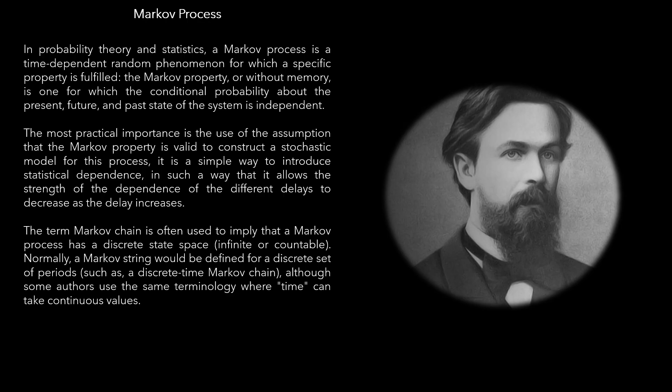We can talk about different definitions regarding first-order Markov processes. States: the conditions in which an entity or possible events are found. Trials: repeated occurrences of an event being studied. Transition probability: the probability of moving from state I to state J in a transition or period.

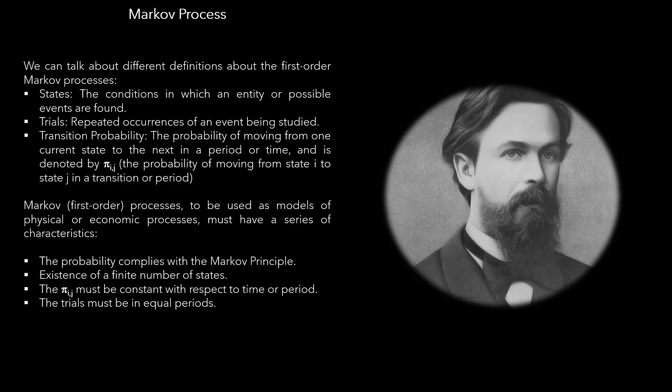First-order Markov processes, to be used as models of physical or economic processes, must have a series of characteristics: the probability complies with the Markov principle, there exists a finite number of states, the probability must be constant with respect to time or period, and the trials must occur in equal periods.

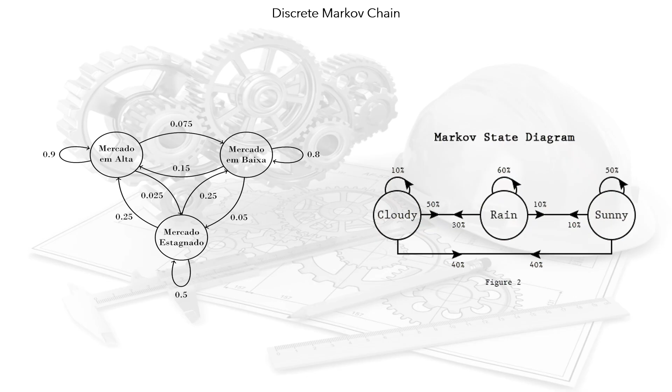The diagram presents two cases of simple Markov chains, one describing customers in a market and one describing the evolution of the climate. Transitions indicate that the probability of migrating from one state to another is independent of previous states and transitions between states. The transition matrix must be estimated from the historical sample, which can be done with a mathematical programming model. The long-term study facilitates the understanding of the behavior of the system.

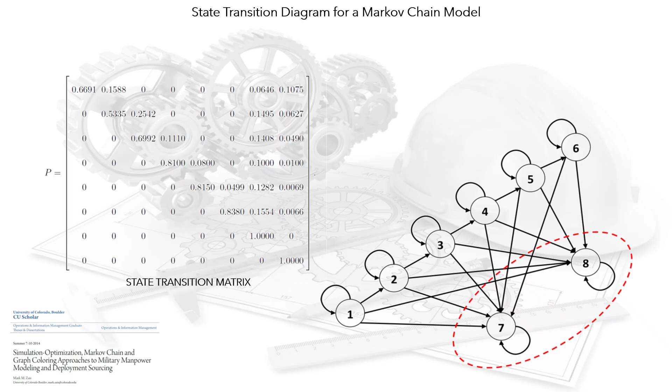The key components of an MDP are: states, the different situations the environment can be in, e.g. a robot's location or a game's board configuration; actions, the choices the agent can make in each state, such as move north, east, south, west; transition probabilities, the probability of moving from one state to another after taking a specific action, incorporating randomness; rewards, the immediate feedback, positive or negative, received after an action, guiding the agent toward its goals; and policy, a strategy or rule that dictates which action to take in each state to achieve the objective.

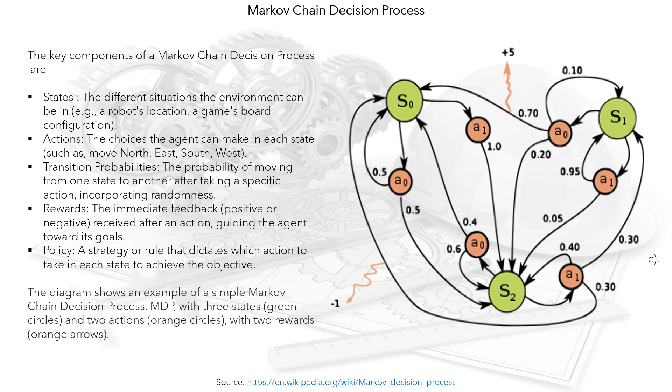The diagram shows an example of a simple Markov decision process, MDP, with three states, shown as green circles, and two actions, shown as orange circles, with two rewards, shown as orange arrows.

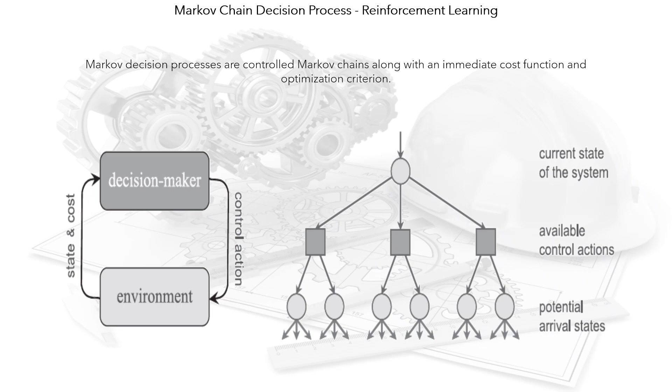Markov decision processes are controlled Markov chains along with an immediate cost function and optimization criterion. The document Linear Programming for Large-Scale Markov Decision Problems proposes to apply mathematical programming to solve the MDP.

The Markov decision process problem is well understood when the state and action spaces are small. Dynamic programming algorithms, such as value iteration (Bellman, 1957) and policy iteration (Howard, 1960), are standard techniques to compute the optimal policy.

In large state space problems, exact dynamic programming is not feasible, as the computational complexity scales quadratically with the number of states. A popular approach for large-scale problems is to restrict the search to a linear space for a small number of features, aiming to compete with the best solution within this comparative class. Two popular methods are approximate dynamic programming (ADP) and approximate linear programming (ALP). This paper focuses on ALP.

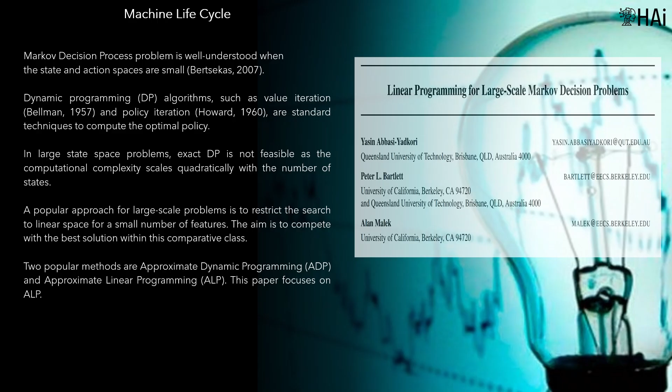The machine life cycle, MLC, aims to establish the characteristics that define productivity in multiple activities such as use, productivity, and wear and tear of the asset because of its use, as well as recovery of productivity thanks to preventive and/or corrective maintenance activities.

The questions to be solved: what are the main features to consider when investing in a machine? For example, do maintenance, turn the machine back on, or replace it? How does the machine's behavior change throughout its useful life?

It is carried out using analytical methodologies to classify the different types of machine behavior patterns according to their technical characteristics and the working environment in which they operate. The objective is the definition and recognition of patterns based on a historical sample of the experiences lived in the organization, or in other similar organizations.

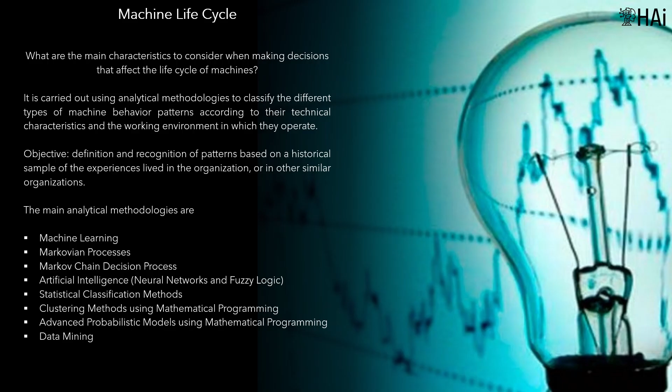The main analytical methodologies are machine learning, Markovian processes, Markov chain decision processes, artificial intelligence, neural networks and fuzzy logic, statistical classification methods, clustering methods using mathematical programming, advanced probabilistic models using mathematical programming, and data mining.

Markov Decision Process optimal maintenance policies are determined by modeling equipment deterioration and maintenance actions as a stochastic process that minimizes costs or maximizes system availability over time. The optimal policy is a set of decision rules dictating when and how maintenance should be performed based on the equipment's current state. In the model, both random failures and failures due to deterioration can occur.

Equipment deterioration is modeled as occurring in k discrete steps. The time spent on each stage of deterioration is distributed exponentially with an identical mean of 1/k·lambda1. The time to failure due to deterioration is represented by an Erlangian distribution. For the application of the stage device, two types of configurations are described, and the parameters of the models are estimated. Maintenance is supposed to improve the condition of the component.

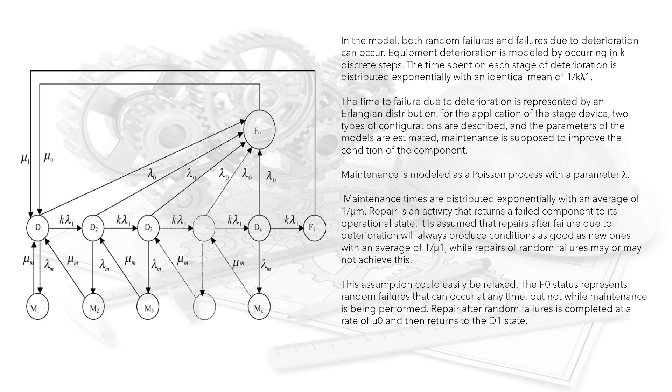Maintenance is modeled as a Poisson process with parameter lambda m. Maintenance times are distributed exponentially with an average of 1/mu m. Repair is an activity that returns a failed component to its operational state. It is assumed that repairs after failure due to deterioration will always produce conditions as good as new, with an average of 1/mu1, while repairs of random failures may or may not achieve this. This assumption could easily be relaxed.

The F0 status represents random failures that can occur at any time, but not while maintenance is being performed. Repair after random failures is completed at a rate of mu0 and then returns to the D1 state. The state space diagram of the maintenance model is shown in the figure.

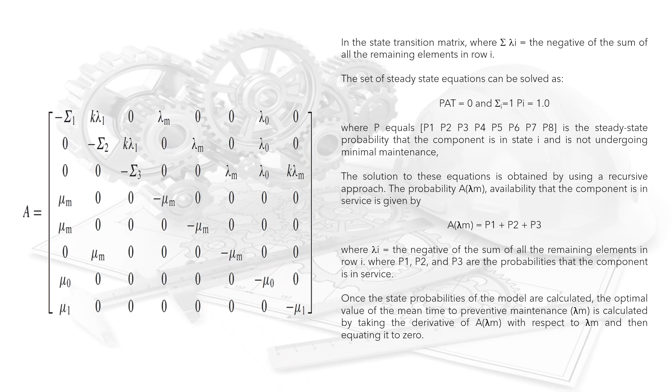In the transition matrix of states, where the sum of lambda I is the negative of the sum of all the remaining elements in row I, the set of steady-state equations can be solved as P·A^T equals 0, and the sum equals 1. Where P equals P1, P2, P3, P4, P5, P6, P7, P8 is the steady-state probability that the component is in state I and is not undergoing minimal maintenance. The solution to these equations is obtained by using a recursive approach.

The probability, A of lambda m, or availability, that the component is in service is given by: availability equals P1 plus P2 plus P3, where lambda I is equal to the negative of the sum of all the remaining elements in row I, and where P1, P2, and P3 are the probabilities that the component is in service.

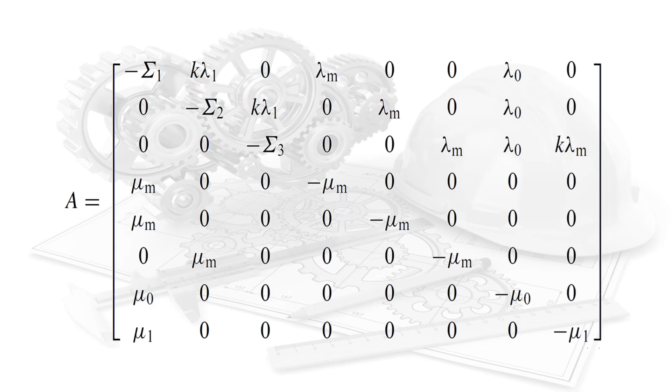Once the state probabilities of the model are calculated, the optimal value of the mean time to preventive maintenance, lambda m, is calculated by taking the derivative of A of lambda m with respect to lambda m and equating it to 0. The solution to these equations is obtained using a recursive approach.

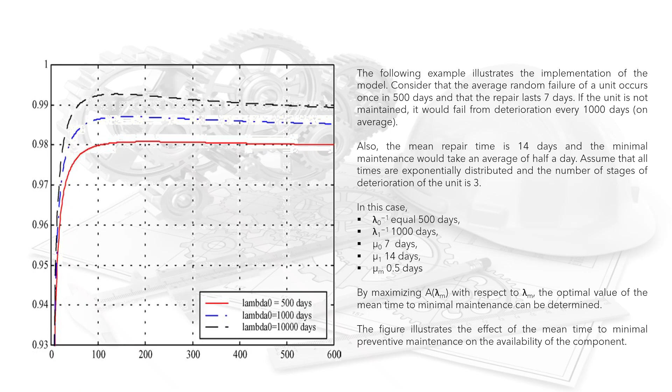The following example illustrates the implementation of the model. Consider that the average random failure of a unit occurs once in 500 days and that the repair lasts 7 days. If the unit is not maintained, it would fail from deterioration every 1,000 days on average. Also, the mean repair time is 14 days, and the minimal maintenance would take an average of half a day. Assume that all times are exponentially distributed and the number of stages of deterioration of the unit is 3.

Maintenance is modeled as a Poisson process with parameter lambda m. Maintenance times are distributed exponentially with an average of 1/mu m. Repair is an activity that returns a failed component to its operational state. It is assumed that repairs after failure due to deterioration will always produce conditions as good as new, with an average of 1/mu1, while repairs of random failures may or may not achieve this. This assumption could easily be relaxed.

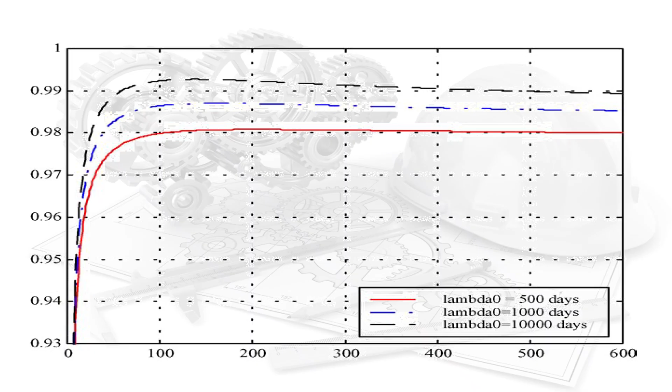The F0 status represents random failures that can occur at any time, but not while maintenance is being performed. Repair after random failures is completed at a rate of μ0 and then returns to the D1 state. The state space diagram of the maintenance model is shown in the figure.

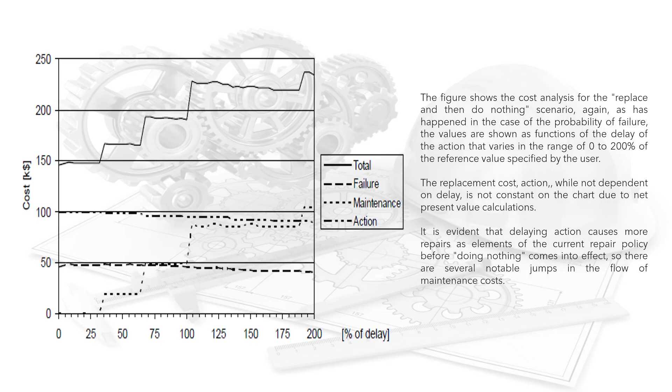The figure shows the cost analysis for the replace-and-then-do-nothing scenario. Again, as happened with the probability of failure, the values are shown as functions of the delay of the action, varying in the range of 0 to 200% of the reference value specified by the user. The replacement cost action, while not dependent on delay, is not constant on the chart due to net present value calculations.

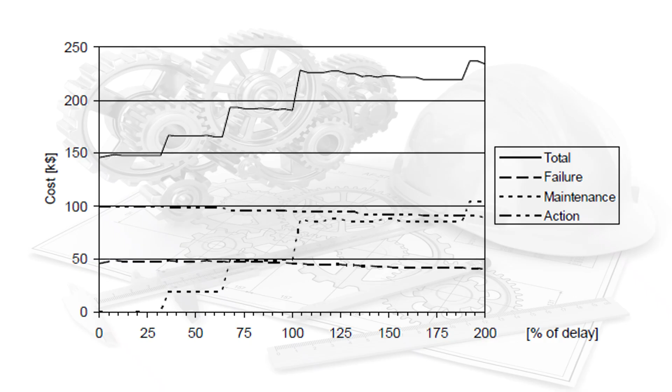It is evident that delaying action causes more repairs, as elements of the current repair policy before doing nothing come into effect, so there are several notable jumps in the flow of maintenance costs. To find the optimal policy, the best action in each state must be selected.

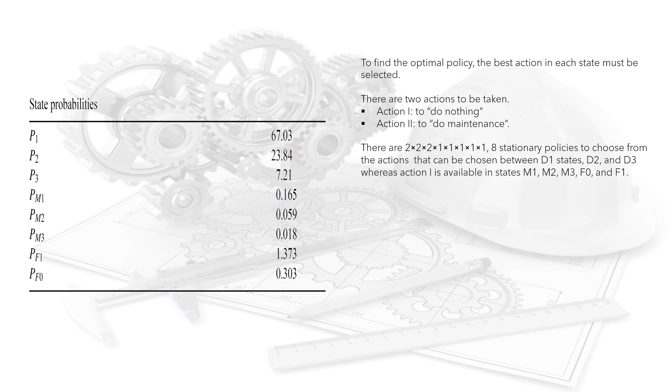There are 2 actions to be taken: Action 1, to do nothing, and Action 2, to do maintenance. There are 2 times 2 times 2 times 1 times 1 times 1 times 1 times 1, giving 8 stationary policies to choose from. The actions can be chosen between states D1, D2, and D3, whereas Action 1 is available in states M1, M2, M3, F0, and F1.

The optimal policy is expected, because the probability of the component transiting to a failure state is getting higher in states D2 and D3. Also, the probability of deterioration failure, which is state D3, is very high.

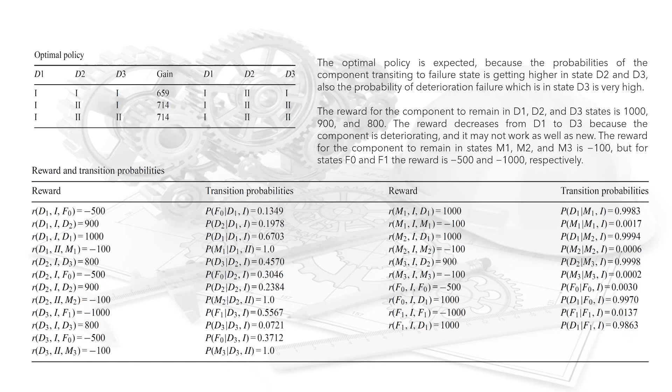The reward for the component to remain in D1, D2, and D3 states is 1,000, 900, and 800. The reward decreases from D1 to D3 because the component is deteriorating and may not work as well as new. The reward for the component to remain in states M1, M2, and M3 is -100, but for states F0 and F1 the reward is -500 and -1000, respectively.

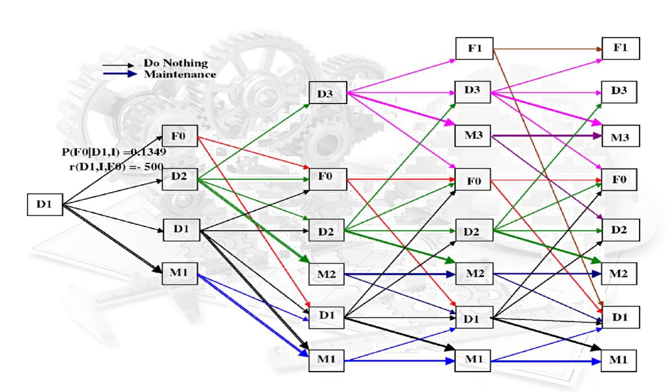The figure shows the state diagram of the component for a case where the number of stages in the process is 4. The document, 'Adjusting Markov Models to Changes in Maintenance Policy for Reliability Analysis,' is a reference for the application.

Efficient and at the same time cost-effective maintenance is an important element for reliable operation in complex technical systems. The selection of the optimal maintenance strategy must consider numerous factors, including reliability and economic factors that are often equally important. On one hand, for successful system operation, failures must be avoided, and this involves extensive and frequent maintenance activities. On the other hand, superfluous maintenance results in high and unnecessary costs. Finding a reasonable balance between the two is a key point for reliable system operation.

The optimal policy is a set of decision rules dictating when and how maintenance should be performed based on the equipment's current state.

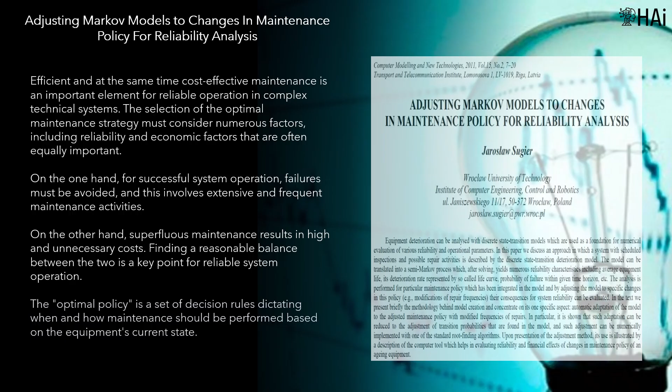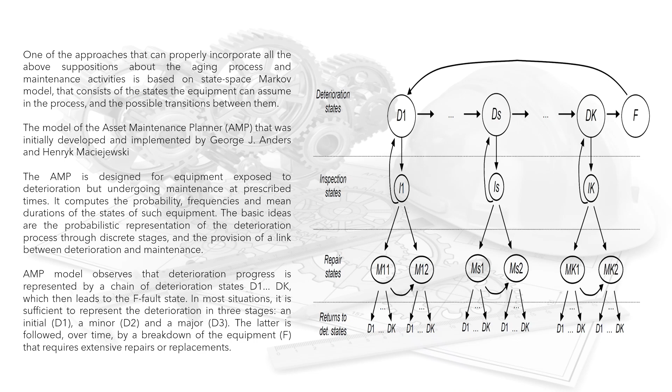One of the approaches that can properly incorporate all the above suppositions about the aging process and maintenance activities is based on a state space Markov model, that consists of the states the equipment can assume in the process and the possible transitions between them. The model of the Asset Maintenance Planner, AMP, was initially developed and implemented by George J. Anders and Henryk Maciejewski.

The AMP is designed for equipment exposed to deterioration but undergoing maintenance at prescribed times. It computes the probability, frequencies and mean durations of the states of such equipment. The basic ideas are the probabilistic representation of the deterioration process through discrete stages, and the provision of a link between deterioration and maintenance. The AMP model observes that deterioration progress is represented by a chain of deterioration states D1 to Dk, which then leads to the F fault state.

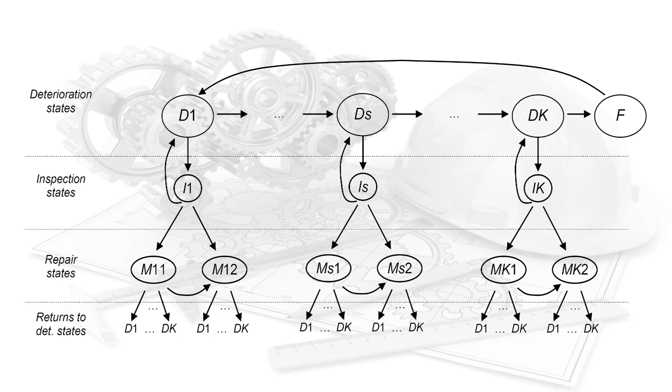In most situations, it is sufficient to represent the deterioration in 3 stages: an initial D1, a minor D2, and a major D3. The latter is followed, over time, by a breakdown of the equipment, F, that requires extensive repairs or replacements. To represent the deterioration process, the equipment life curve is used, which shows the relationship between the state of the asset, expressed in engineering or financial terms, and time.

This concept is easy to understand for a non-expert user who does not know the details of state transition models and Markov processes. The life curve corresponds to a Markov model that calculates the mean time to first pass, FPT, from the first deterioration state D1 to the failure state F, resulting in an average equipment service life, i.e., the length of the curve. Solving the model for condition probabilities calculates the expected durations of the states, determining the shape, i.e., the rate of deterioration in different phases of equipment, which requires additional decisions on how the deterioration states are mapped with the ranges of asset condition values.

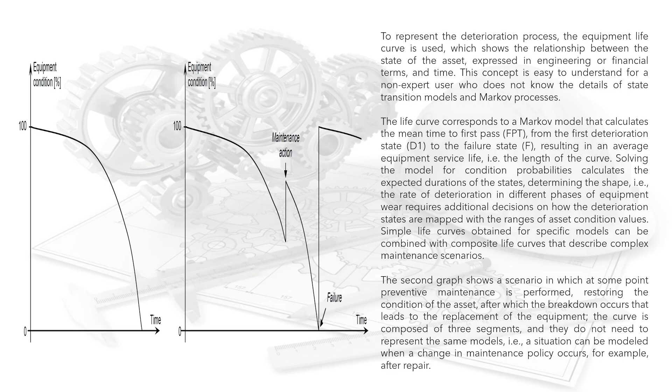Simple life curves obtained for specific models can be combined into composite life curves that describe complex maintenance scenarios. The second graph shows a scenario in which at some point preventive maintenance is performed, restoring the state of the asset, after which a breakdown occurs that leads to the replacement of the equipment. The curve is composed of 3 segments, and they do not need to represent the same models, a situation that can be modeled when a change in maintenance policy occurs, for example, after a repair.

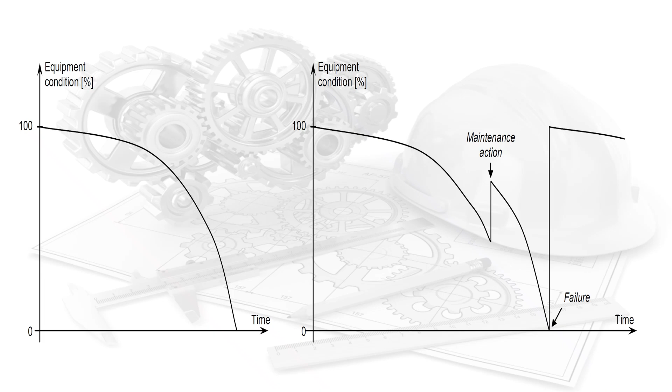The Asset Risk Manager, ARM, uses the concept of life curve and discounted cost to study the effect of equipment aging under different hypothetical maintenance strategies. The results are based on Markov models adjusted to modified maintenance policies. This is done by pre-running the AMP program by an expert user. AMP and ARM are closely related and typically need to run consecutively.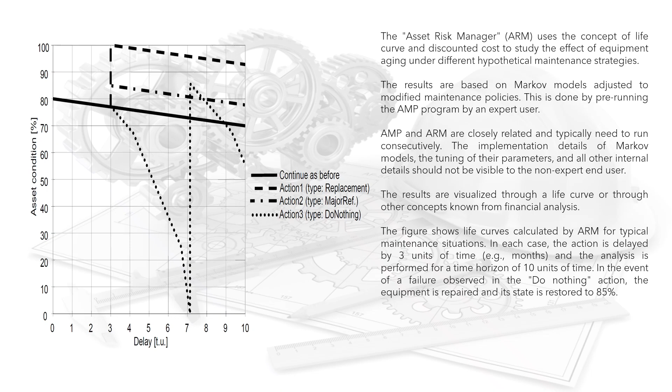The implementation details of Markov models, the tuning of their parameters, and all other internal details should not be visible to the non-expert end user. The results are visualized through a life curve or through other concepts known from financial analysis.

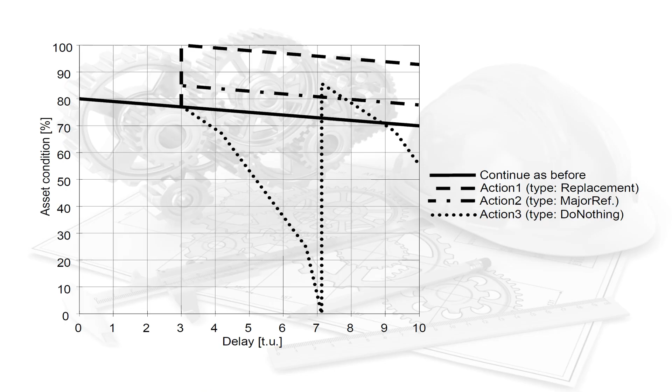It starts with the historical life of the assets, stored in the information system, to perform the preliminary data analysis. The result is the segmentation of equipment types. Subsequently, the characterization of the behavior of the equipment by segment is carried out. Predictive analysis is then performed to determine the projection behavior of the equipment by segment.

For new equipment, a classification model must be in place. Transition matrices should be modeled using equipment segments, which should be oriented to a Markov decision process. Finally, an individual asset maintenance analysis must be carried out, considering the specific characteristics of each piece of equipment, which will generate individual equipment decisions.

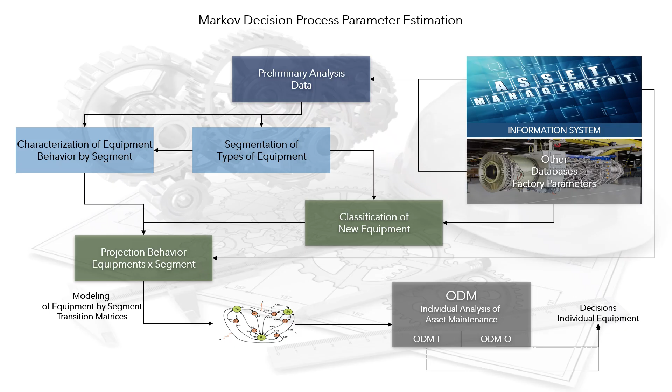Tribute to Hernando Duran Castro, my master's professor, in 1975, at the Universidad de los Andes. Nothing is necessary, nothing is enough, everything is useful. Always must learn, I add it. May he rest in peace.